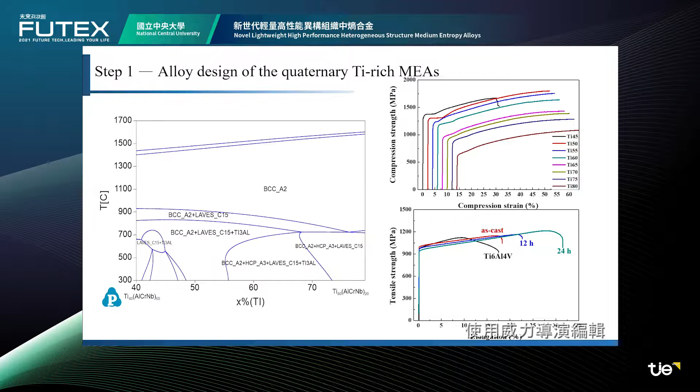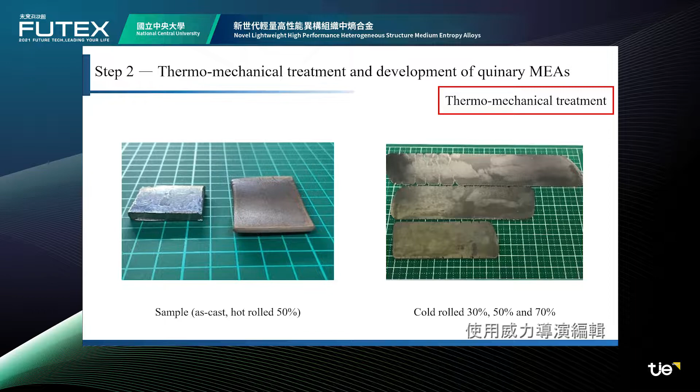Moreover, after homogenization heat treatment, the plastic deformation can be enhanced to more than 30%. Later, based on titanium 65, we introduced thermomechanical treatment in processing. The mechanical properties can be further exploited through different amounts of rolling processing and heat treatment parameters.

In the EBSD image, when the annealing temperature is performed at 500 to 800 degrees Celsius, the alloy cannot be recrystallized effectively due to insufficient energy. So a large number of deformation bands will still be retained in the alloy.

On the other hand, annealing at high temperature with short time, the recrystallized grain can effectively nucleate and refine, becoming about 70% smaller than the casting alloy.

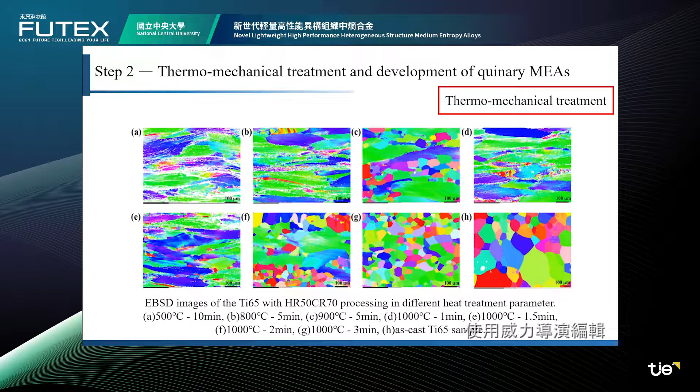In mechanical properties, it can be noticed that grain size has little effect on the strength of titanium 65 medium entropy alloys. Besides, the time of heat treatment plays an important role in plastic deformation.

Among the parameters tested, the best heat treatment is annealing at 1000 degrees Celsius for 3 minutes. The mechanical properties of titanium 65 can then reach 1200 megapascal with 30% elongation.

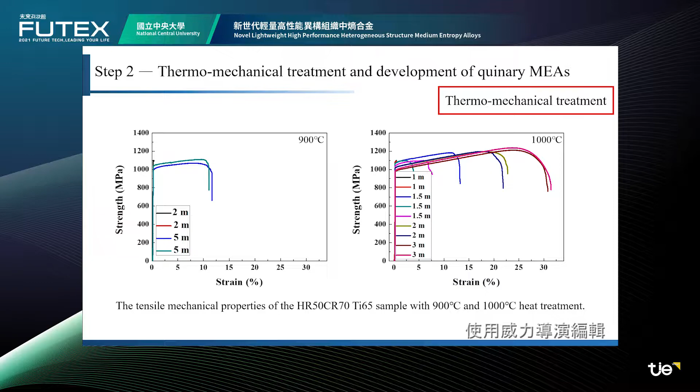Also, we used titanium 65 as a basis to further adjust the alloy system by adding vanadium. We still used a calculator to simulate and predict the structure with different aluminum content.

Then in the X-ray analysis, it is proven that the alloy can maintain the BCC phase, which also verified the result of the calculator simulation.

In the compression testing, the plastic deformation of each alloy can exceed 50%, and the strength is enhanced with increasing aluminum content. However, in the tensile testing, the ductility of aluminum 12 is reduced significantly, while aluminum 18 is completely brittle fracture.

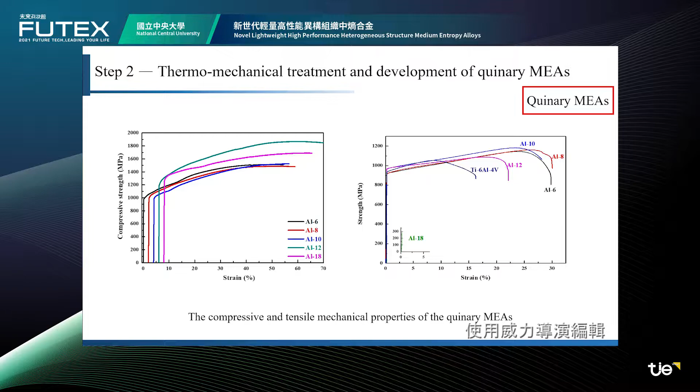In the third stage, we further discuss the parameters of thermomechanical treatment. It can be seen that the grain size of titanium 65 medium entropy alloys is effectively reduced when the heating rate of the annealing temperature increases.

Corresponding to the mechanical properties, the higher the annealing rate, the higher the alloy strength, which conforms to the concept of the Hall-Petch equation.

Moreover, we explored the mechanical properties under partial recrystallization conditions. The strength of titanium 65 at 57 seconds and 65 seconds is increased 100 to 200 megapascal compared to homogenization, while the ductility does not reduce too much at the same time.

By EBSD figures, it can be seen that the alloy is composed of retained deformation grains and fine recrystallized grains simultaneously. This structure is also called a heterogeneous structure, which is the most popular subject in alloy research recently.

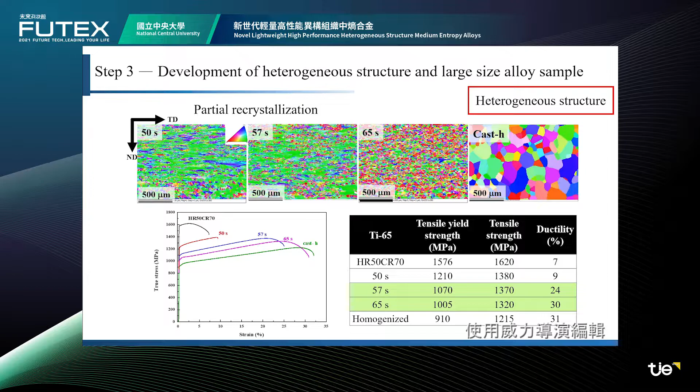In addition, we also used titanium 65 to carry out research on commercial application of a large-size alloy sample. We entrusted MIRDC to prepare the casting sample, while the hot forging was completed by Loyal Fidelity Aerospace, and the cold rolling was carried out at National Central University.

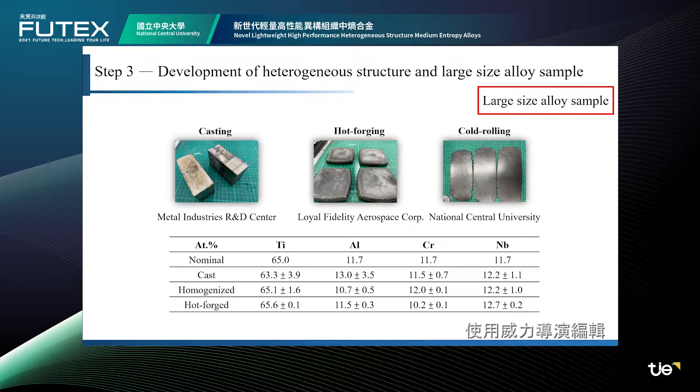Through EDS analysis, we can see that the proportion of elements is close to the nominal composition after heat treatment or forging. A stereo microscope was used to observe the surface morphology of the alloy after hot forging, and you can see there are no obvious defects on the surface after hot forging.